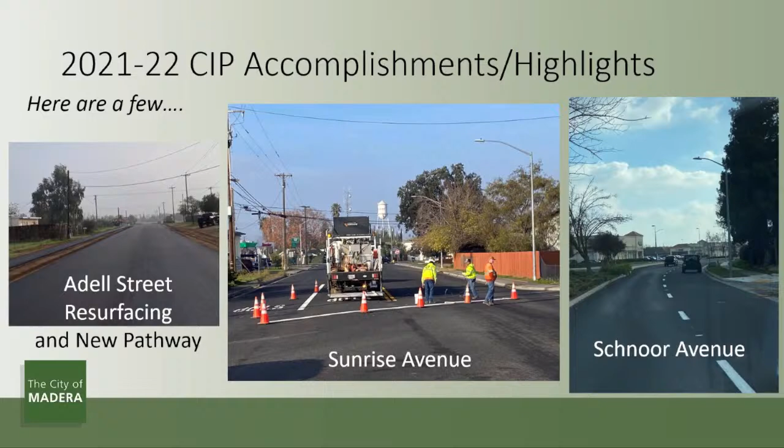Sunrise Avenue, Schnoor Avenue—you see that the streets have been resurfaced through there, and they're looking pretty good.

Accomplishments and highlights continued. This is an example of $1.25 million in consultant engineering contracts. Those contracts turned into $18.4 million in construction projects.

We're looking to move more projects out to consultants, and I think Ellen and I will talk a bit more in detail about what we're doing with that, but we want to go ahead and get more projects out to consultants.

Upcoming engineering services contracts: the AHSC grant is moving forward. We have received an RFP for design on that, and that's 5 miles of sidewalks, 3 miles I believe of bike lanes and the like. That has to be completed by July 2024, I believe. But that's a fairly major improvement to the city of Madera with regard to sidewalks.

Actually, it says 3+ miles of sidewalk because I'm getting a head nod. It's 3 miles, not 5.

On-call engineering services: we do have an RFP out, and we received results on that. We finaled at 12 engineering firms submitting on-call services with the city. This is something we've been wanting to do for some time, but it's going to help us accelerate projects and get them onto the street and give us more flexibility. On-call contracts give us flexibility in terms of letting contracts.

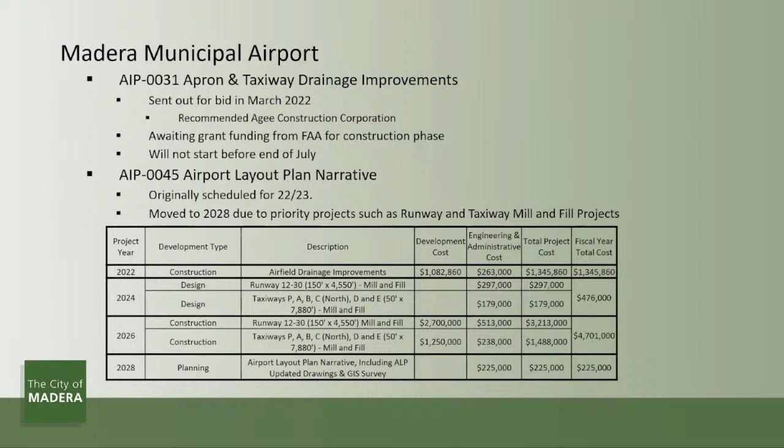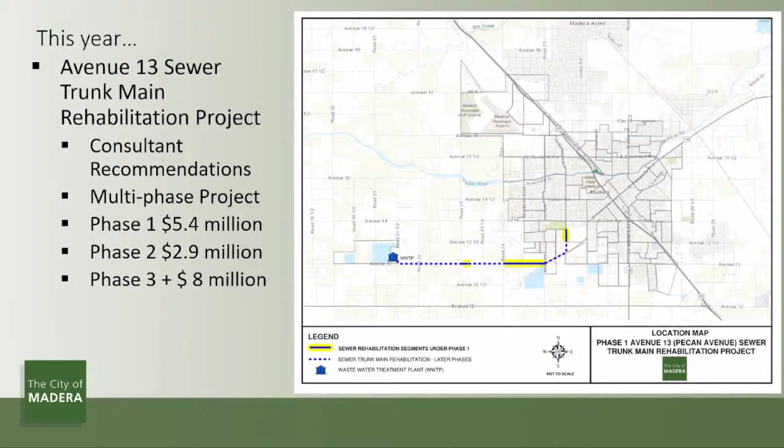In the following years, we hope to advance the rehabilitation of the Avenue 13 trunk sewer main. We want to start a program of annual video inspection, so we'll break up the city into quadrants or something similar, with a budget for how many miles of sewer pipeline we can camera a year. We've also established a budget of $1.4 million to start doing the rehabilitation, replacement, and repairs on all those pipes that have been identified. Even if they're not showing as visually deteriorated to a terrible extent, some of these pipes are over 100 years old, so we're going to be proactive and start replacing them before they really show their age.

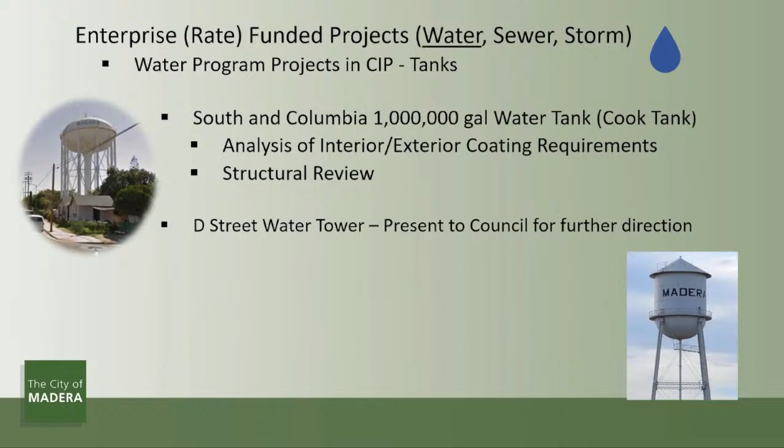Okay, again, kind of similar to the sewer list of projects, a lot of these are carryovers from last year's CIP. However, we have made progress with the water main replacement across the Fresno River. We are getting ready to bring to you a phase 2 of the engineering consultant services agreement for the actual design and construction documents. We did some initial preliminary assessment and vetted what permitting requirements were going to be needed, so we're moving into the next phase for that project.

Regarding the water meters, Steve is project manager on that project. We have a consultant inventorying all of the areas where we thought there weren't meters and/or old meters that need to be replaced. We've actually found there are quite a few locations where meters are installed, and it's just a matter of programming it and getting the meters and utility billing talking to one another to transfer accounts over to being measured by use. That will hopefully result in completing the rest of the unmetered services. We're trying to capture all of the larger manual read meters that maybe aren't reading effectively, so 3 inches and larger will also be replaced with modern automatic read meters. Part of the consultant's work is to give us an ongoing program layout, how many meters per year, so we get on a regular routine of replacing all of our meters in the city. Say if it's every 10 years a meter should be replaced, we'll have that program going and budgets to go with that.

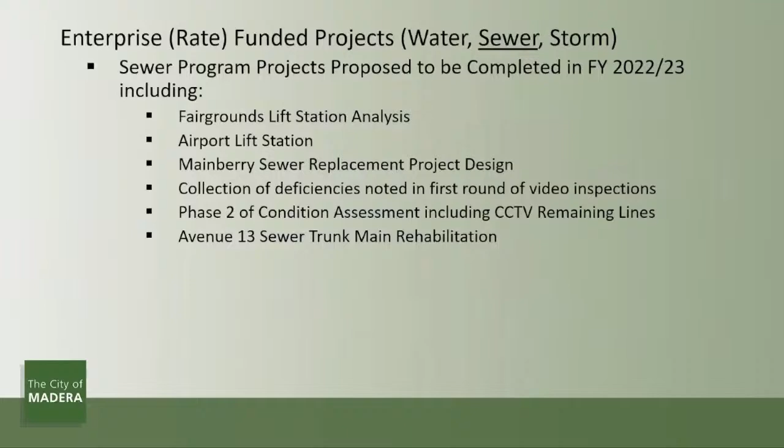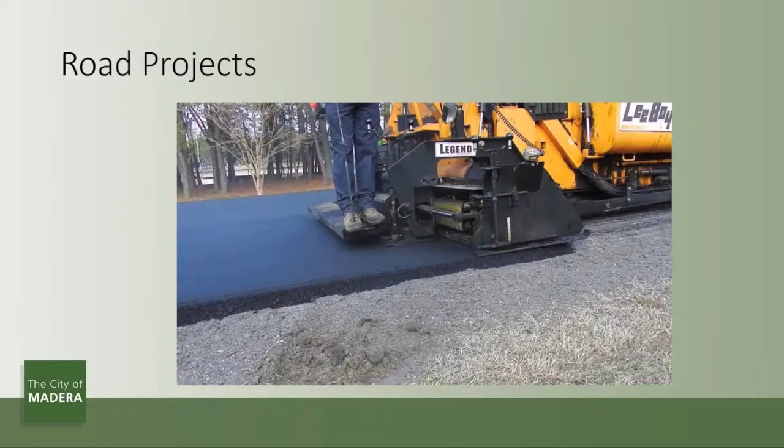Okay, so here we are moving above surface to the road systems, and I will start with our road rehabilitation program. We've been fortunate that the funding sources for road rehab purposes continue to increase, where at one time we thought they were going to be cut short because of COVID and people not out and about.

It seems to have held steady. Our local tax measure, the Measure T program, with everybody either shopping online or shopping in town - we've seen those revenues continue to increase through this, and MCTA has reported that they expect to see even a surplus over what was projected in 21-22, some additional funds that will come to the agencies to reprogram. So the gas tax funds are reportedly higher and projected to continue to increase. That's the RMRA funds.

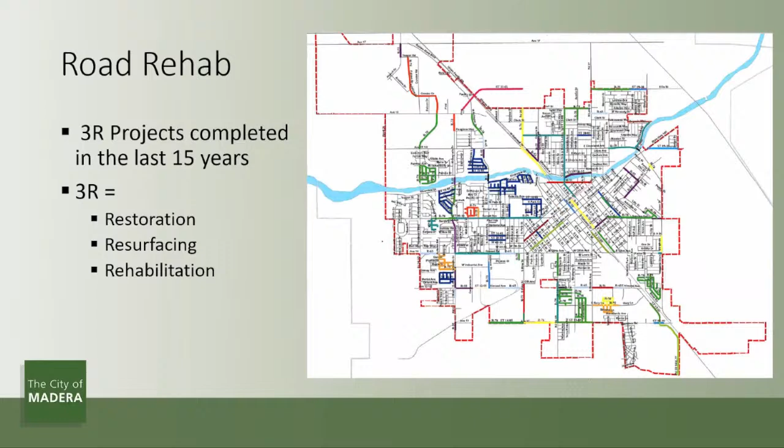Kind of matching the funding source. This map, I know it's hard to see, is showing all the streets that have been touched by engineering projects in the last 15 years, those 3R type projects. So we're starting to fill in the grid here. There are some neighborhood projects Public Works did a few years ago that may not be represented here. If we can get that data, I think it would be fun to show it on this map, showing what areas have been addressed.

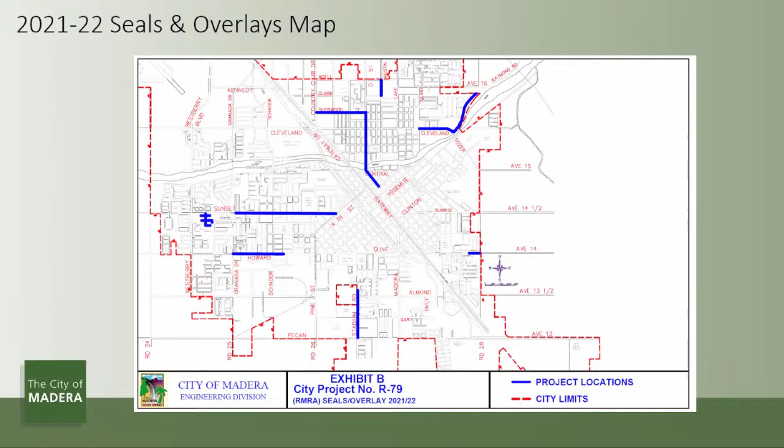Going forward, this project we hope to have out this summer is the next seal and overlay project. It's called R79, and it's, I would say, 80% design, so we're close to being able to put that out. Last night's council meeting, you approved a list for the 22-23 RMRA funding list, and this map is the streets that were on that list.

Before I go into traffic signals, I want to mention we have a pavement management program that analyzes all our collectors and arterials, generating what streets should receive treatment next, and what types. The goal is to capture them before they get in really bad shape, and also preserve streets that are only 5-10 years old, doing some treatment so they stay at that level and hopefully don't degrade further.

At the moment, our local streets use a site survey analysis, but this year's CIP includes funding for the pavement management system to evaluate all city streets—local streets as well as collectors and arterials again. That will tell us exactly what the pavement condition index, or PCI, is for all our streets, and help us prioritize projects moving forward.

Okay, traffic signals and pedestrian safety devices. This past year we finished and were able to flip the switch and turn on Howard and Granada, and Howard and Westberry, as well as the Hawk signal on Stadium Road near Alpha Elementary.

We have a temporary crosswalk out there, and there was a request at one time to add a permanent fixture. A couple slides ago, it's budgeted - if we go back, the crosswalk was also budgeted for that. It's the first item, the first bullet point: Granada and industrial crosswalk. Maybe Keith or Ellen can explain the acronyms - I think we both have it. Yeah, this is the crosswalk to get to Town and Country Park.

The original grant called for us to have funding by March of this year. That was a bit too long, so Public Works installed the ramps themselves, the crosswalk, and some signs. This project at the top completes that with other improvements, including a physical median island and the rapid flashing beacons.

The reason I asked the question earlier, Ellen, was because looking at the Cleveland project, you said going from 2 to 6 or 4 to 6 lanes. My understanding was there was also a proposal to widen Granada from 2 to 4. Was that not the case? No, I don't recall planning for that just yet. We typically do - I apologize if I may have confused that at some point in the past.

We were looking at this crosswalk, considering the possibility that Granada would eventually go to 4 lanes. That's one reason we started looking at rapid flashing beacons. With 2 lanes, I don't consider the crosswalks quite as much of a concern, but as soon as it goes to 4 lanes, the safety concerns go way up in terms of the ability to hurt pedestrians. So I mentioned Granada going to 4 lanes at some point in the future, which is why we were doing extra measures, including a median island in the street and the flashers.

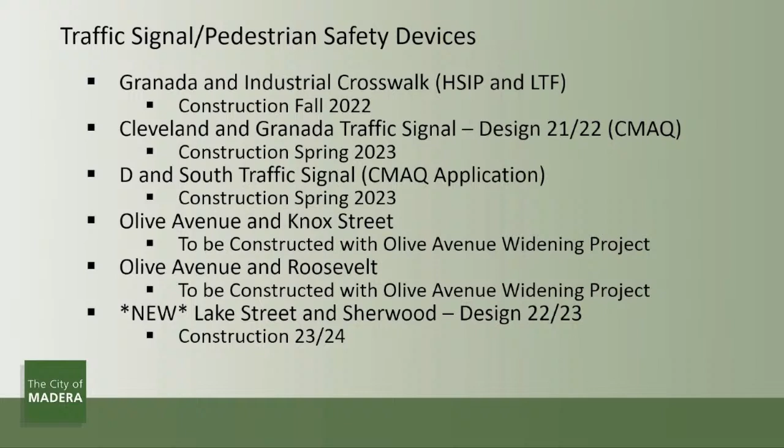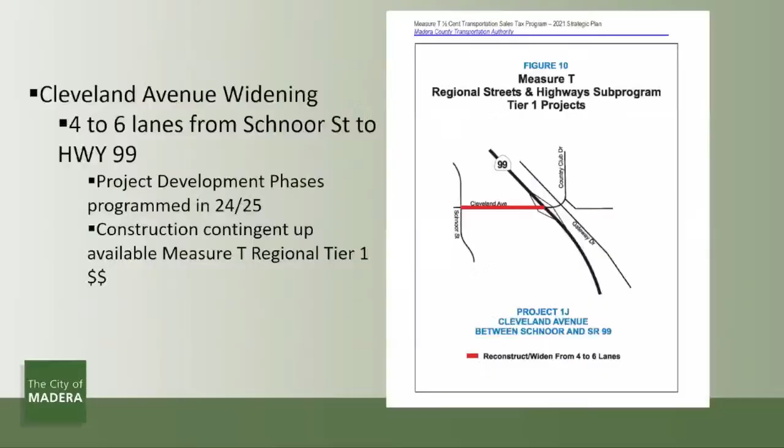That completes the presentation on our major street projects. Now, more of a complete streets approach, a term you'll hear more and more, covering the bicycle and pedestrian components of the roadway. We have several projects under design and hopefully under construction next year. The Schnoor Avenue project from Sunset to Riverside, filling in gaps of missing sidewalk, is funded with CMAQ funds, and we have a consultant working on it. The same consultant is working on projects to install sidewalks on Della Valley and Austin, serving Washington Elementary School, and that project should also move forward.

This next slide, I was hoping to bring in Jonathan, one of our project managers, who is overseeing all the different phases of this AHSC project we were talking about. So if he's available... Speak up, Jonathan. Thank you, Ellen. Good evening, Mayor and Council members. Can you hear me all right? Just want to check. Yes.

To talk a little more about the AHSC, I'm overseeing the additional part, which includes sidewalk, school, and bicycle related improvements. We split the project into 3 portions. First is the improvements at George Washington Elementary, where we're installing flashing beacons, rebuilding some ramps to make them ADA compliant, and upgrading the striping on Della Valley at Lincoln and on Della Valley and South.

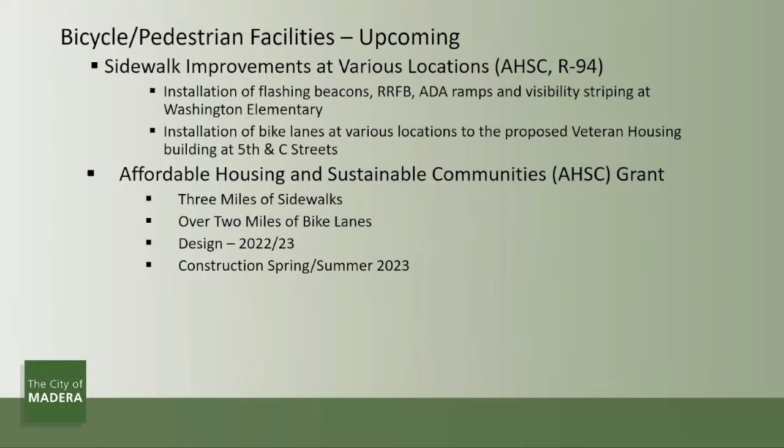Just a point of clarification: we have 2 projects right now around Washington Elementary. One was the CMAQ project I mentioned before, and this one is specifically at the entrance to Washington Elementary and on the other side of it. Hopefully you'll see that at your next council meeting, awarding that contract.

All right, we are coming to a close shortly. Bridges: we have a couple of bridge rehab projects funded with federal bridge preventative maintenance. They're on deck for this year to complete design and hopefully advertise. We also have the Granada Pedestrian Bridge, for which we received CMAQ funding. We want to move that to design this year and start the permitting process. That's for a separate pedestrian and bicycle only bridge that would parallel Granada - it'll be in that same alignment, but not attached to or part of the vehicle bridge. It will tie in well with the trail on the south side.

The Westberry Bridge construction is funded for design in 22-23, and we hope to be bringing a contract proposal for the design in the next meeting or two. We've been moving forward with the consultant that was part of the original bridge concept design, so now it's the next step. Full funding for that bridge, as you'll note in the CIP, is not available yet, but having the bridge design plans done will let us better evaluate the costs and perhaps go for grant funding and plan for that.

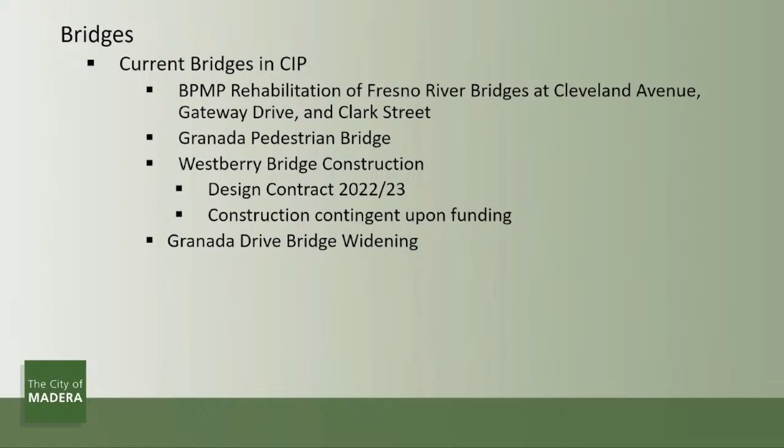Sometimes we include significant studies in our CIP because they usually lead to capital projects. A couple of years ago, we received a grant to do a study of Yosemite Avenue as a downtown Main Street. That resulted in a cooperative agreement with Caltrans, and they expanded their maintenance project on Yosemite Avenue to include the complete streets components that have been presented to you in the past. This was just to highlight that even though it's not our project in the CIP, it came out of one of our studies.

Rolling into the end of the presentation, at least from our side, after you've received and considered this, the CIP document, and the staff report, we would recommend approving a minute order accepting the report and authorizing submittal to the Planning Commission for the conformity determination. But of course, we welcome feedback, comments, questions, or direction at this time.

I was serious a while ago when I was mentioning Mr. Rodriguez regarding putting some monies into the improvement of the living quarters for the fire department. I want to know what your response would be to pushing back monies toward either renovation or building a brand new city hall. Correct me if I'm wrong, or kind of enlighten us. How much infrastructure do we have for our existing staff in our facilities? Do we have vacant facilities in the city?